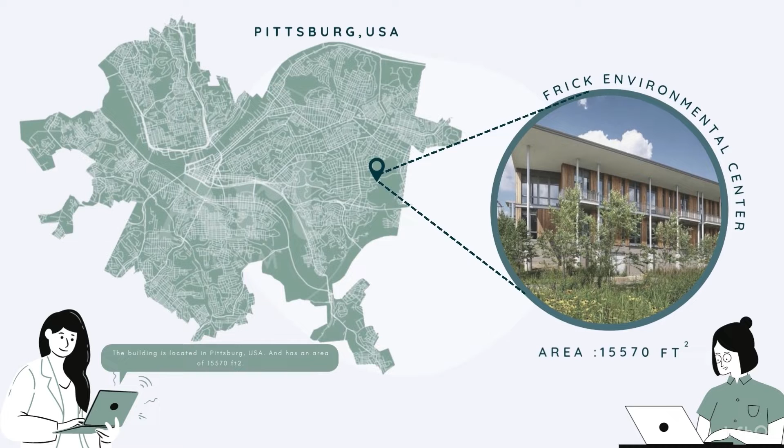Today we'll be presenting on low energy building analysis. The net zero building that we are analyzing is the Frick Environmental Center. The building is located in Pittsburgh, USA and has an area of 15,570 square feet. The building was completed in 2016, designed by renowned architecture firm BCJ.

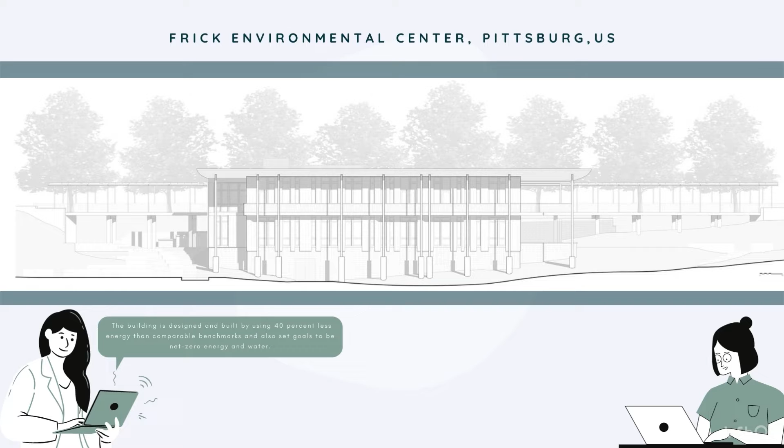Oh, I see. So what's so special about this building? The building is designed and built using 40% less energy than comparable benchmarks and also set goals to be net zero energy and water. Oh, I see that this building has been awarded LEED Platinum.

Very impressive. Yes, indeed. Let me show you a video on the building water efficiency. As water consumption is reduced, then less energy is used. Emissions are reduced and we move toward net zero.

Water is an important natural resource that Pittsburgh is lucky to have in abundance. We receive nearly 40 inches of precipitation annually. Much of that falls during heavy rainstorms that can overwhelm our antiquated sewer system and cause damage through flooding and erosion. With climate change, our region is predicted to see both an increase in overall precipitation and more frequent intense storms.

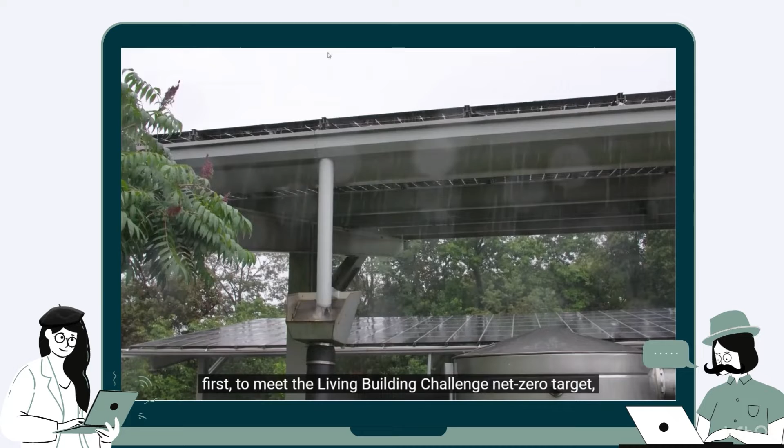At the Frick Environmental Center, we have two goals with respect to rainwater. First, to meet the Living Building Challenge net zero target, we need to capture at least as much water as we use on site. Second, we need to return water to the environment in ways that protect the ecosystem and human health and eliminate the burden on our older sewer system.

As you can see, Frick Environmental Center managed to score full points under the water efficiency category, which meets the goals of making the building net zero water. Wow, what are some techniques that have been used in this building? The building achieves net zero water through several techniques. Firstly, they reduce water use and demand through reduced flow and ultra-high efficiency plumbing.

I heard that a historical fountain was also planned for the park, but it would require a lot of water to provide the visual and auditory effects. Yes, so this was achieved by minimizing the volume of water used in the fountain to be only 4 inches deep with a low bubbling jet.

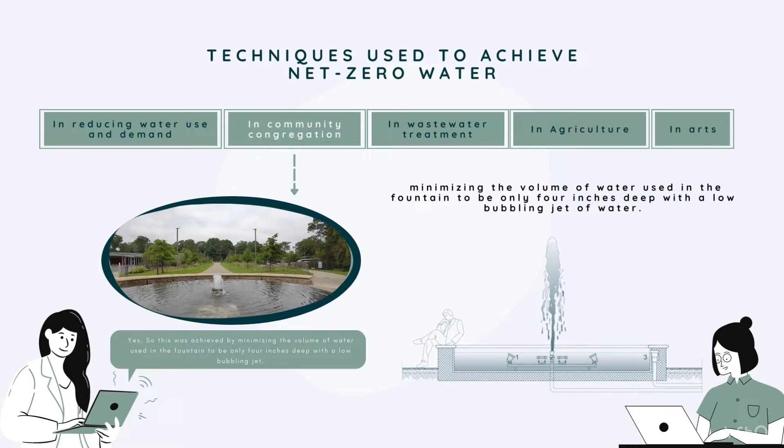Wastewater is treated and discharged on site using an underground treatment system and drip irrigation field. The treatment first separates waste solids from water in the dual vault septic tank with aerobic and anaerobic bacterial digestion. The secondary treatment is provided by a recirculating sand filter to further allow for biological digestion.

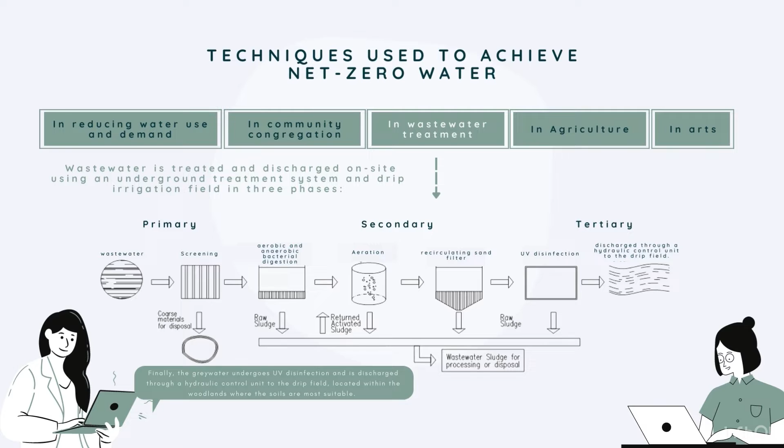Finally, the grey water undergoes UV disinfection and is discharged through a hydraulic control unit to the drip field, located within the woodlands where the soils are the most suitable. Agriculture also plays an important role by disposing and reducing demands of water as seen.

I saw that the environmental artist has also designed a watershed sculpture called Falls Ravine that will be activated by rainwater that flows off the roof and through a series of runnels set into the sandstone terrace. The building seems to have many net zero features.

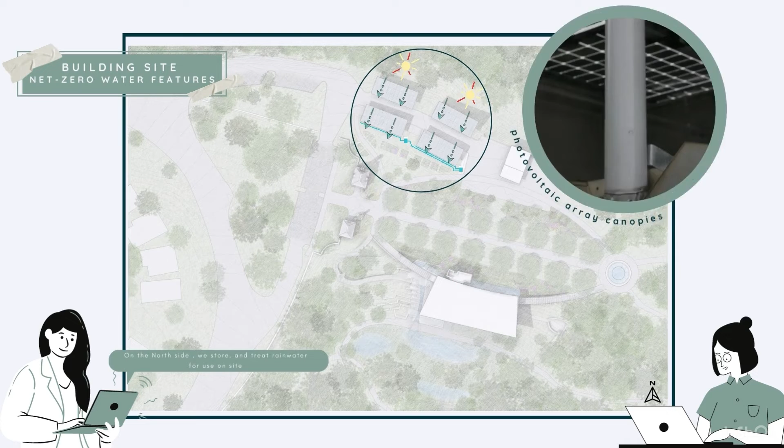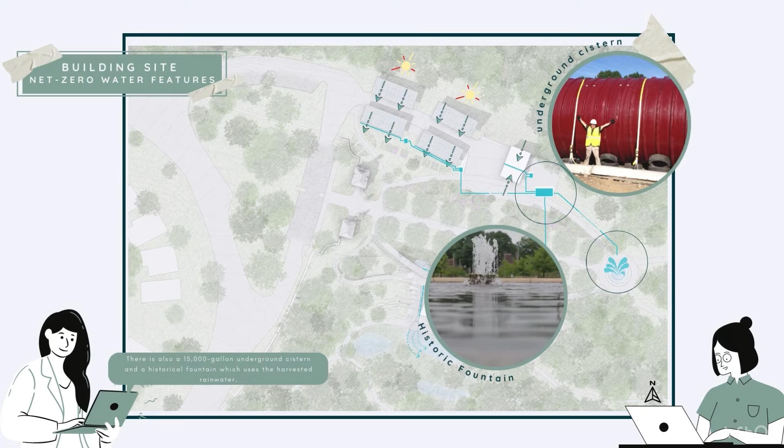On the north side, we store and treat rainwater for use on site. Designed with a simple slope roof, rainwater falls from the slope roof in a dramatic sheer curtain called the rain veil. There is also a 15,000-gallon underground cistern and a historical fountain which uses the harvested rainwater.

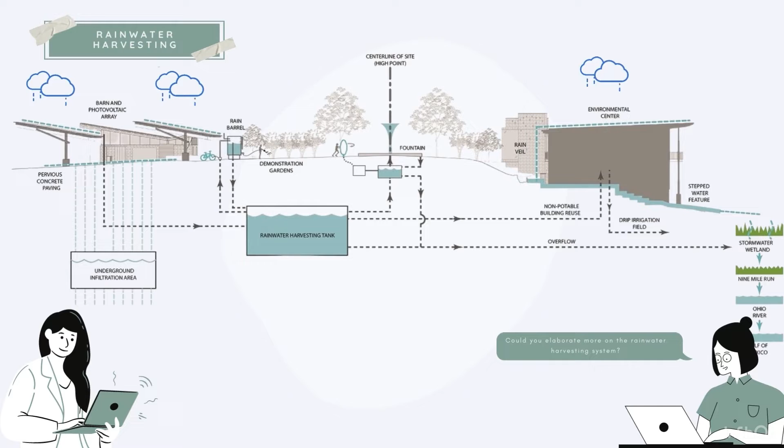There is also rainwater infiltration surrounding the site in the form of pervious pavers, and the pond on the south also consists of a rainwater filtration system. Could you elaborate more on the rainwater harvesting system? First off, the solar panels over the parking lot not only generate energy, they also collect and store rainwater.

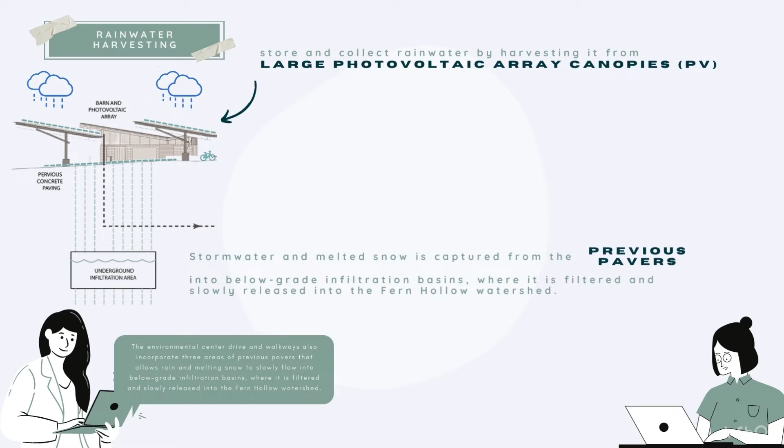The Environmental Center drive and walkways also incorporate 3 areas of pervious pavers that allow rain and melting snow to slowly flow into a below-grade infiltration basin, where it is filtered and slowly released into the Fern Hollow watershed. Rainwater from the solar panels and nearby barn roof is channeled into two 500-gallon rain barrels and a 15,000-gallon underground cistern for potable and non-potable usage.

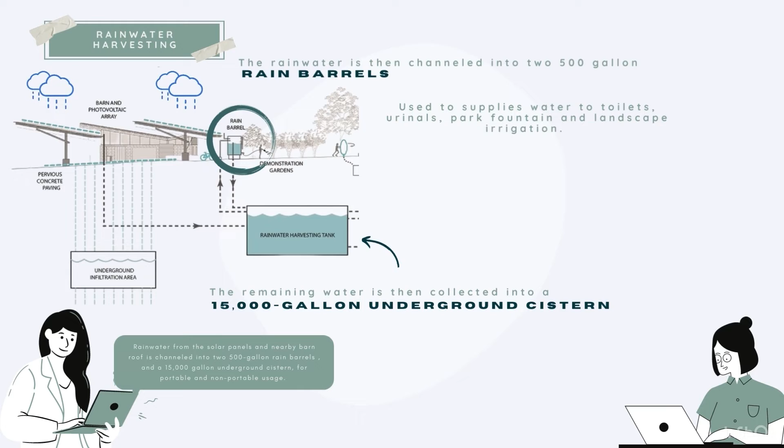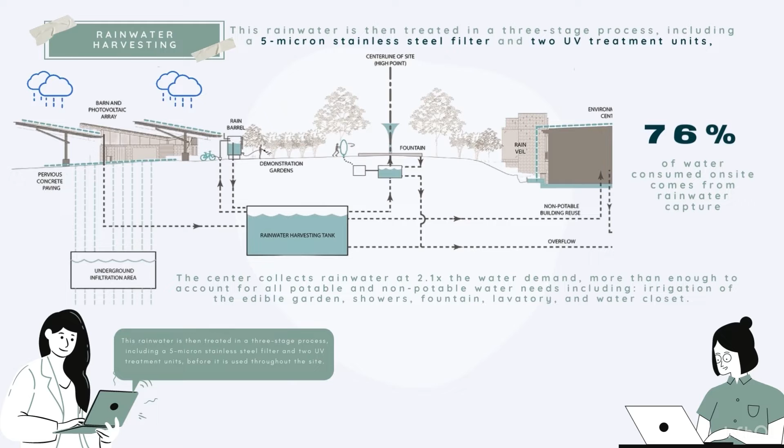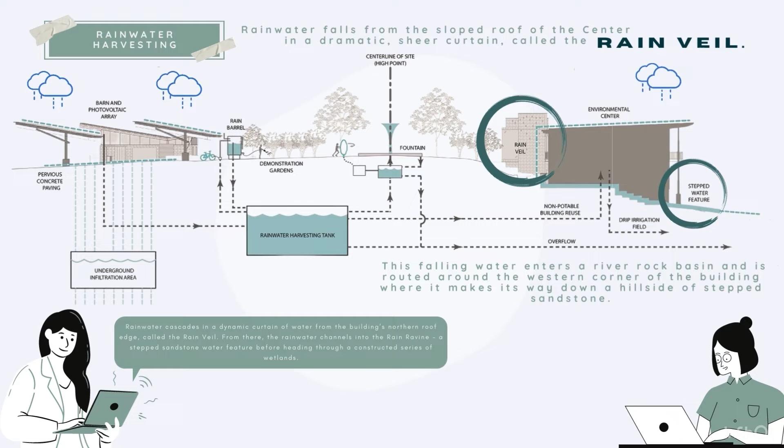This rainwater is then treated in a 3-stage process, including a 5-micron stainless steel filter and 2 UV treatment units, before it is used throughout the site. Rainwater cascades in a dynamic curtain of water from the building's northern roof edge, called the rain veil. From there, the rainwater channels into the rain ravine, a stepped sandstone water feature, before heading through a constructed series of wetlands. The center is not connected to the city sewer system. Wastewater is treated and discharged on site using an underground treatment system and drip irrigation field.

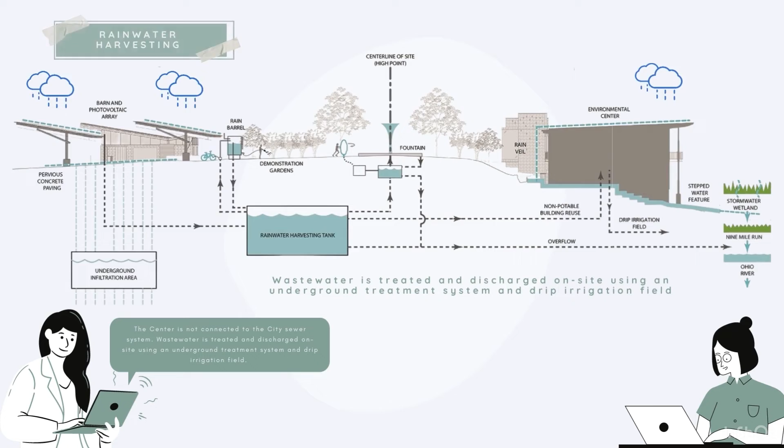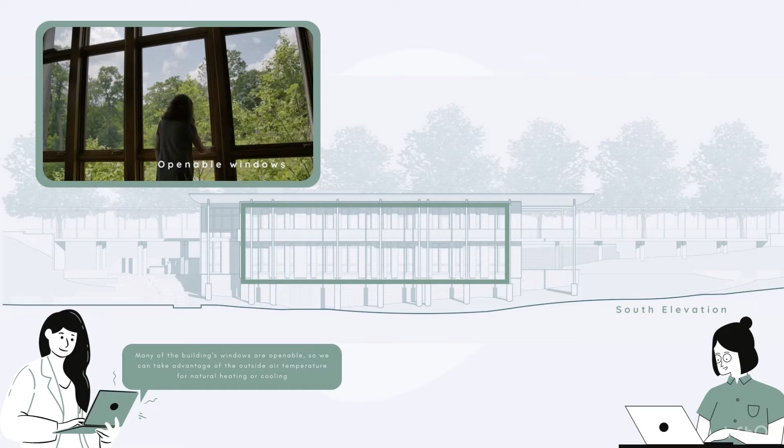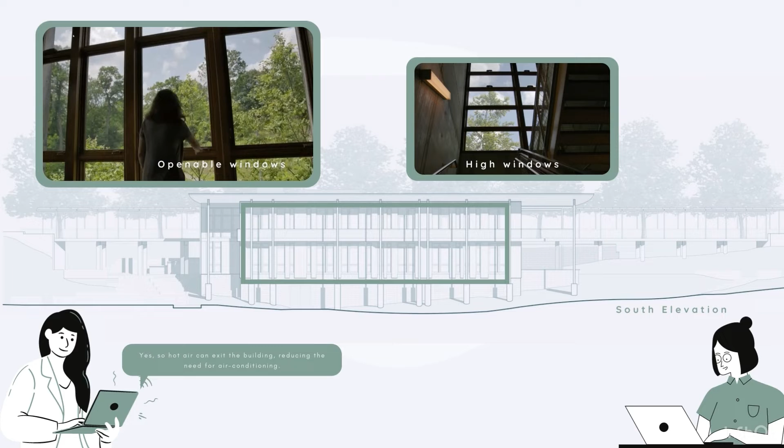I see that the building managed to divert a huge amount of stormwater per year and also remove a good amount of total suspended solids. With that amount, it's no wonder the energy usage is so low. The surrounding wetlands and building facade also play an important role to provide natural ventilation to the building. But how? Many of the building's windows are openable, so we can take advantage of the outside air temperature for natural heating and cooling. I see that the building also has high-up windows that open at night during warm weather. Yes, so hot air can exit the building, reducing the need for air conditioning.

The building is oriented in a way that encourages natural ventilation. Cool air comes in on lower floors and works its way through the entire building. The automated skylight creates stack effect. The facade also consists of many openable windows facing the wetland and dense woodlands, which helps maintain cooler air temperature through evaporative cooling. The prevailing summer wind and winter wind provided by the fenestration of the facade also contributes to maintaining the thermal comfort of the building.

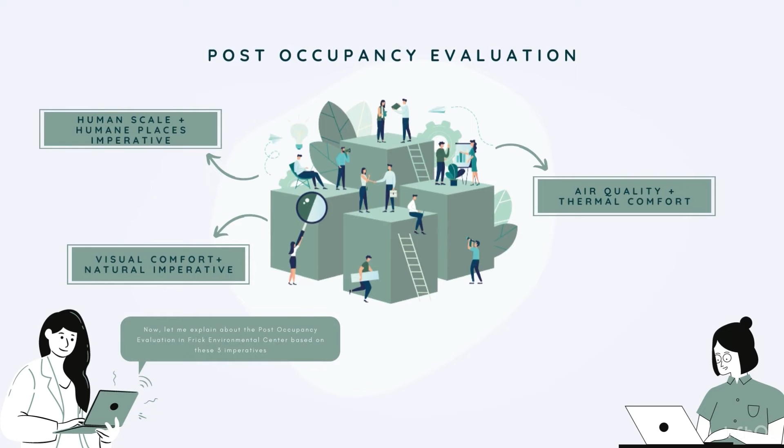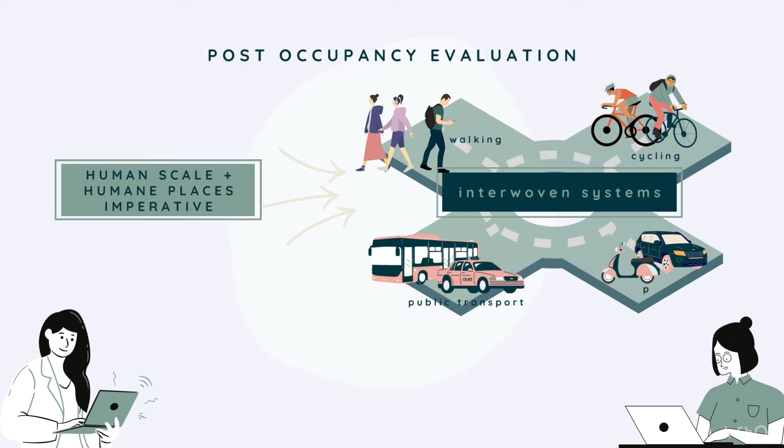Now, let me explain about the post-occupancy evaluations in Frick Environmental Center based on these three imperatives. Sounds great. Frick Park connects 8 distinct city neighborhoods through an interwoven system of public trails. The site is highly accessible by foot, bikes, public transportation, and private vehicle. The center is designed inclusively and focused on the accessibility for all, closed to vehicle traffic within the park, and low and unobtrusive signage promote a pedestrian pace. Wow, they designed the park truly to encourage people to walk, which reduces carbon emissions.

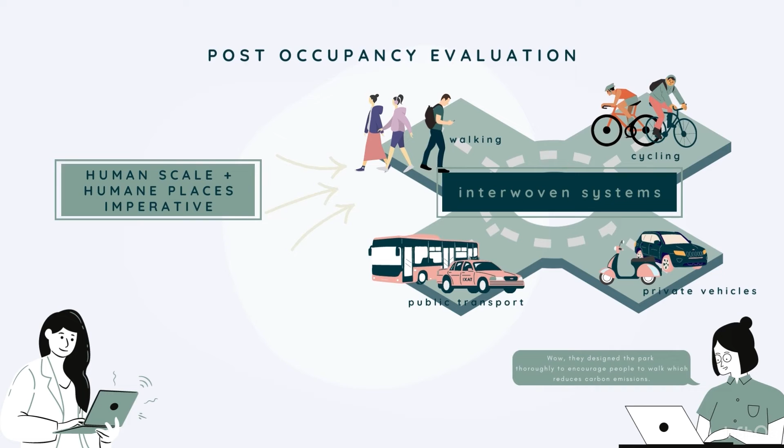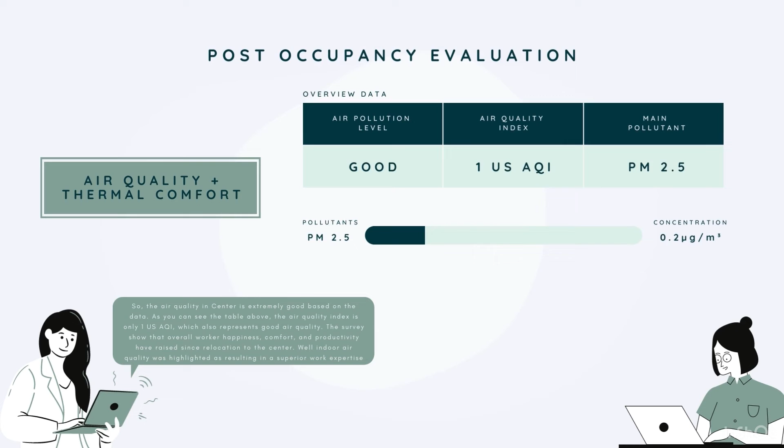So, the air quality in the center is extremely good based on the data. As you can see in the table above, the air quality index is only 1 US AQI, which also represents good air quality. The surveys show that overall workers' happiness, comfort, and productivity have risen since relocation to the center, while indoor air quality was highlighted as resulting in a superior work experience.

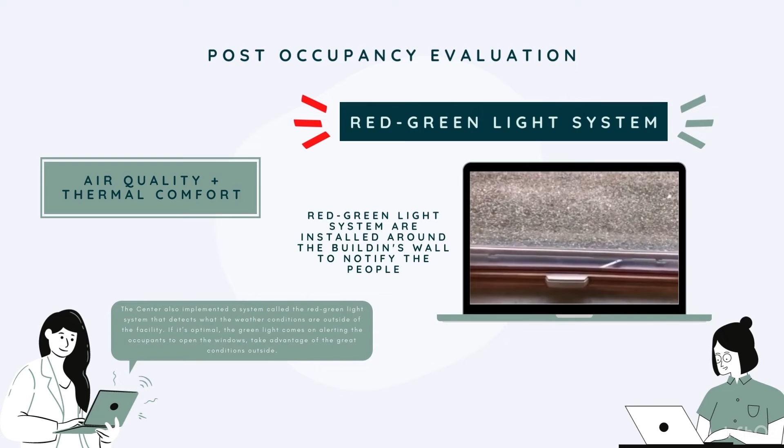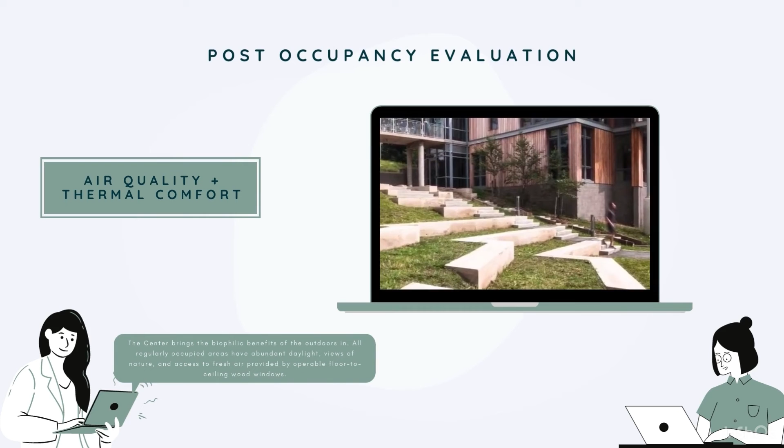The center also implemented a system called the red-green light system that detects what the weather conditions are outside of the facility. If it's optimal, the green light comes on, alerting the occupants to open the windows and take advantage of the great condition outside. Wow, they're taking elements from nature as always and use them in a really effective way to use less energy. The center brings the biophilic benefits of the outdoors in. All regularly occupied areas have abundant daylight, views of nature, and access to fresh air provided by operable floor-to-ceiling wood windows. Yeah, I heard a lot of good reviews on this.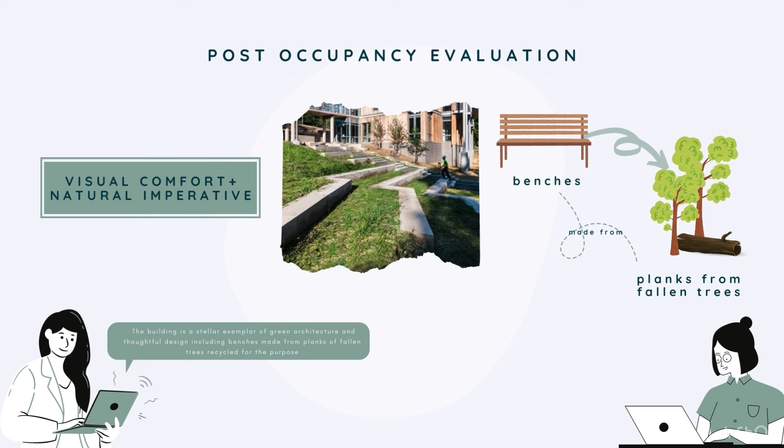The center welcomes everyone to experience nature on the site as they desire. From relaxing in the amphitheater on a lazy spring afternoon to tasting freshly picked tomatoes from the gardens on a hot summer's evening to embarking upon an exhilarating walk with a dog on a winter morning. The building is a stellar exemplar of green architecture and thoughtful design, including benches made from planks of fallen trees recycled for the purpose. Impressive. Frick really does have it all.

We hope that you acknowledge the importance of sustainability in architecture and understand the impact of the built environment on the global scene and the energy demands in buildings. And hopefully, we get to promote and spread the awareness of sustainable architecture to other buildings through this video.